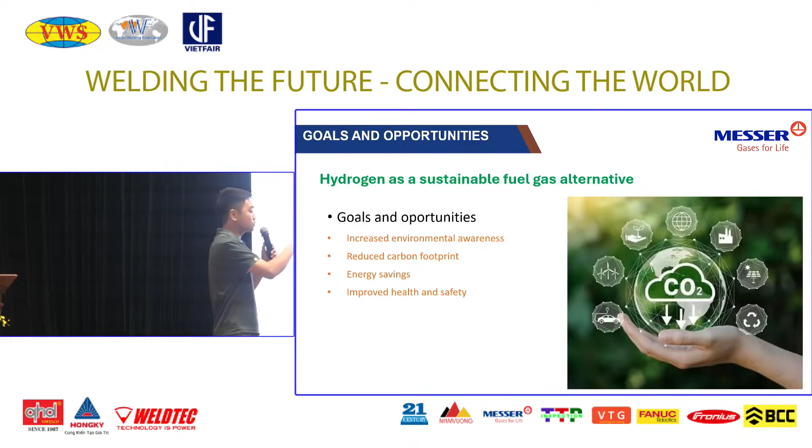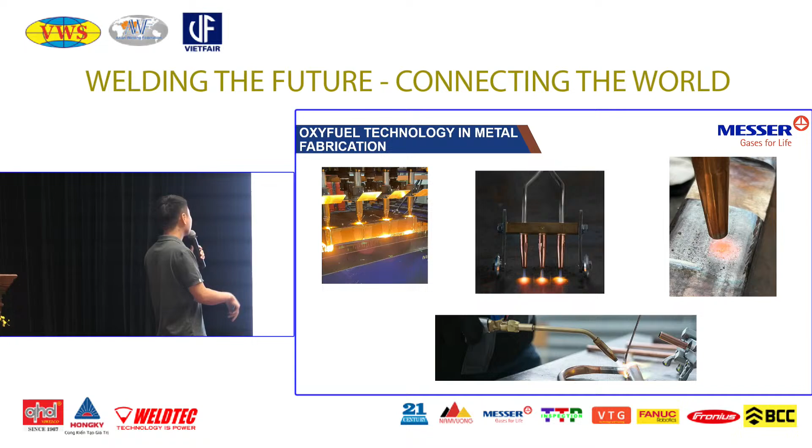Of course you are here as experts in welding and cutting. You know that oxy-fuel technology in fabrication has a lot of applications like cutting, straightening, heating, welding, and soldering.

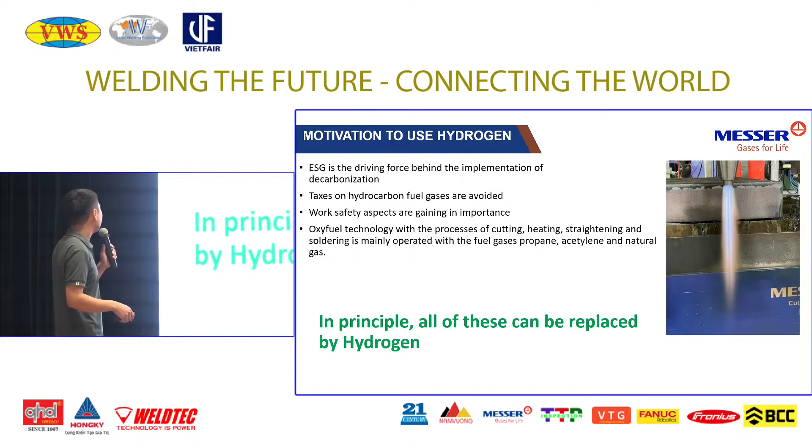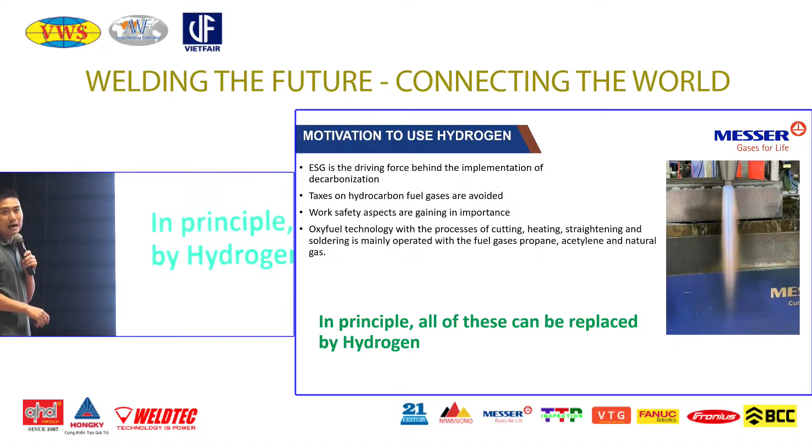So about the motivation to use hydrogen, ESG is the driving force. Every country in the world is talking about ESG. Taxes on hydrocarbon fuel gas also avoids using LPG or acetylene. Work safety is also gaining more importance in the world. Oxy-fuel technology processes like cutting, heating, straightening, and soldering are mainly operated with fuel gases like propane, acetylene, and natural gas. In principle, all of those processes can be replaced by hydrogen. That's Messer's purpose here.

We'll talk a little bit about the advantage of hydrogen in oxy-fuel technology. We did a comparison about CO2 emissions during flame cutting, and here is the result. With hydrogen, you can see there's no carbon atom in the molecule. Comparing the frames, you can see approximately 6 times lower CO2 emission compared to acetylene, and almost 10 times lower CO2 emission compared to propane when cutting. That's very important for CO2 footprint reduction.

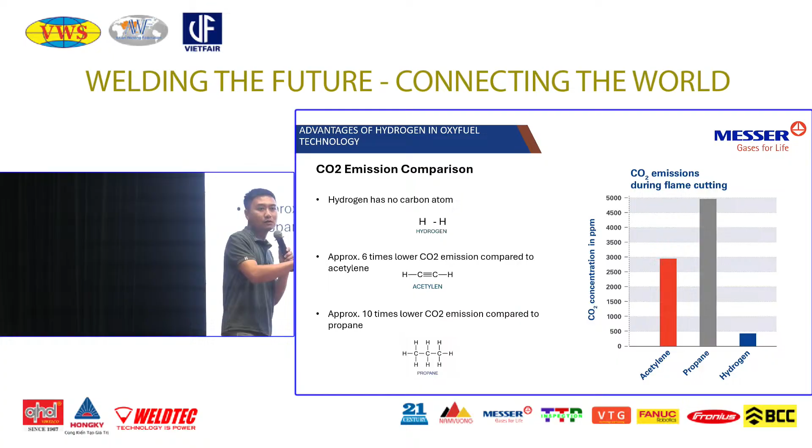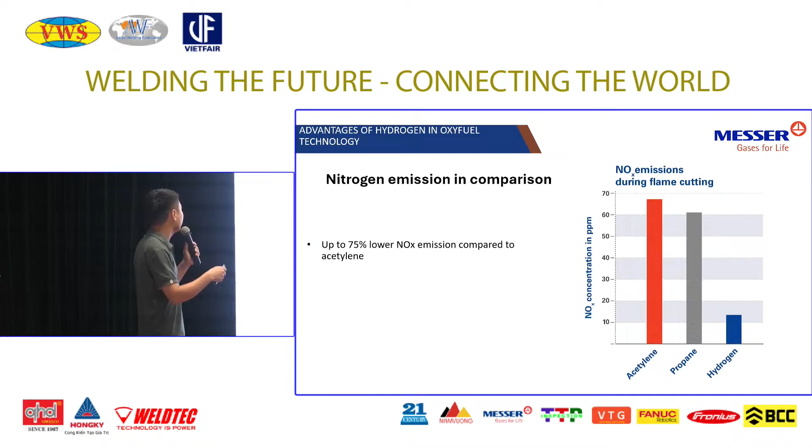For nitrogen oxide emission in comparison, up to 75% lower nitrogen oxide emission compared to acetylene, as you can see in the frame there.

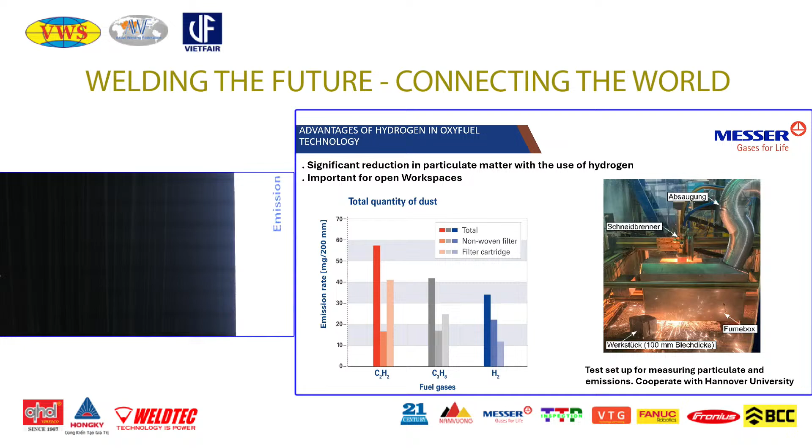This is the result for dust. You can see that with hydrogen we have much less compared with acetylene and propane, and this is very good for the work environment for the worker.

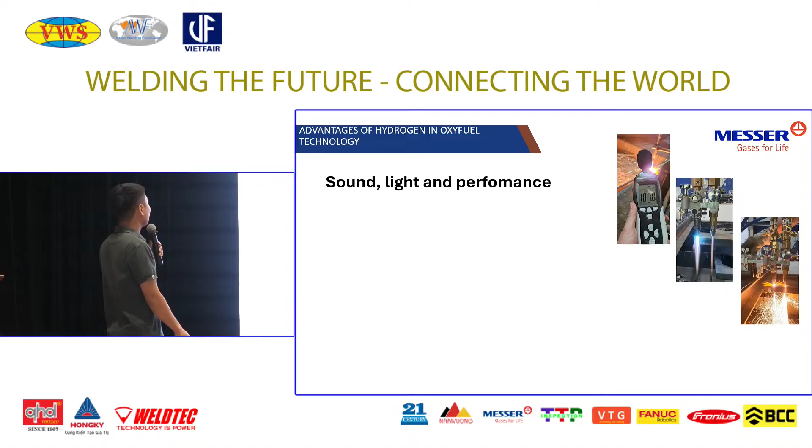About the sound, light, and performance of production, we measured that when cutting or heating with hydrogen, the sound level is 3 to 10 decibels lower, depending on the application - whether cutting, welding, or heating.

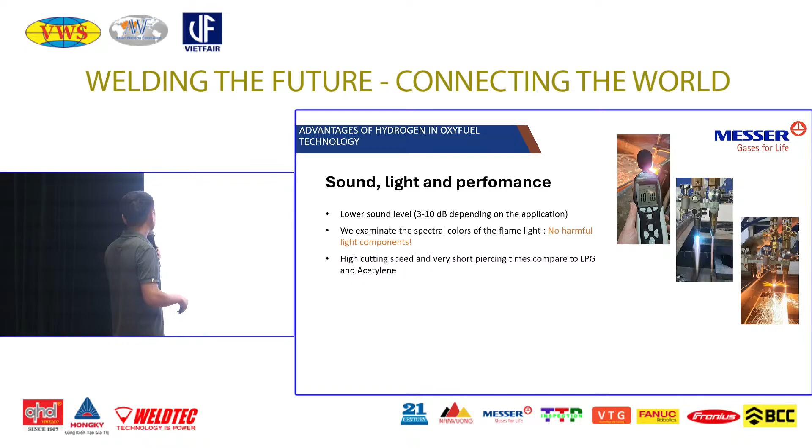We examined the spectral color of the flame light, so there's no harmful light affecting the eyes of the worker - that's a good sign for cutting with hydrogen. And with our equipment, we got high cutting speed and very short piercing time compared to LPG and acetylene.

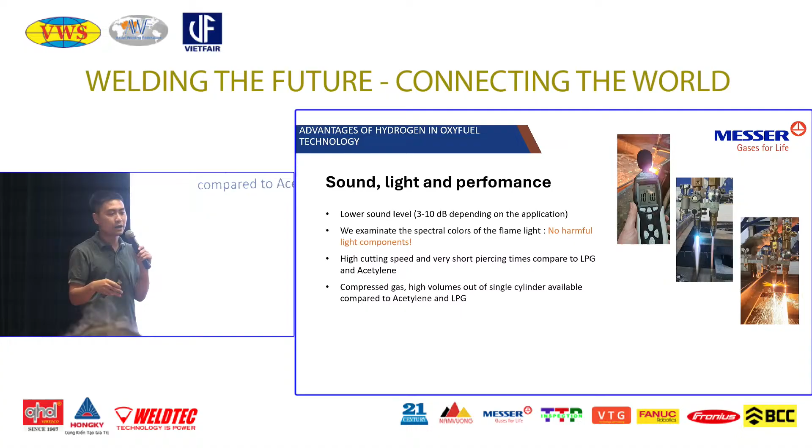Of course, with hydrogen compressed gas at high volume, now in Vietnam we have 200 bar in a cylinder of 50 liters.

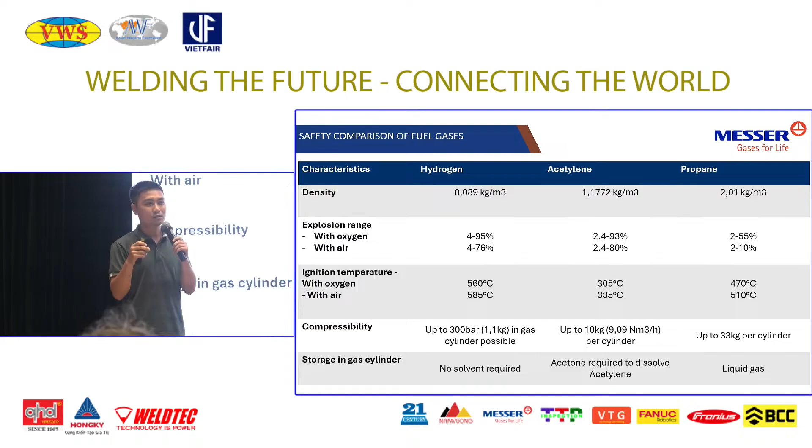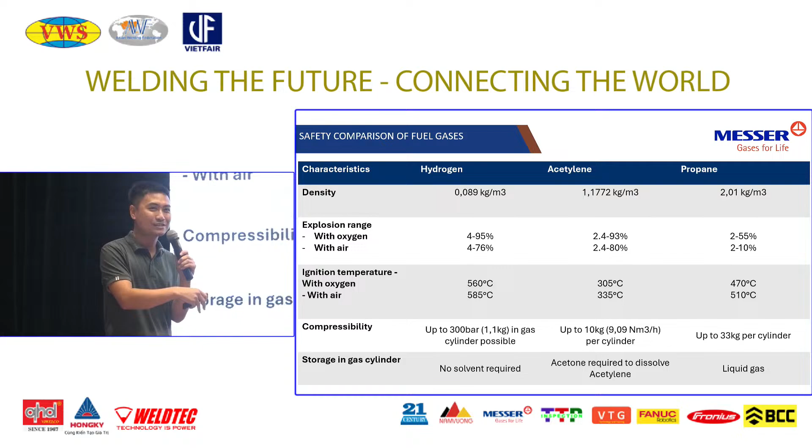I know everybody here will be concerned a little bit about safety when changing from LPG to hydrogen, and this is the characteristics of hydrogen, acetylene, and propane. Before this presentation, I got a question from Dr. Cho about safety. For Messer around the world, we really care about safety - safety is always the first thing we think about.

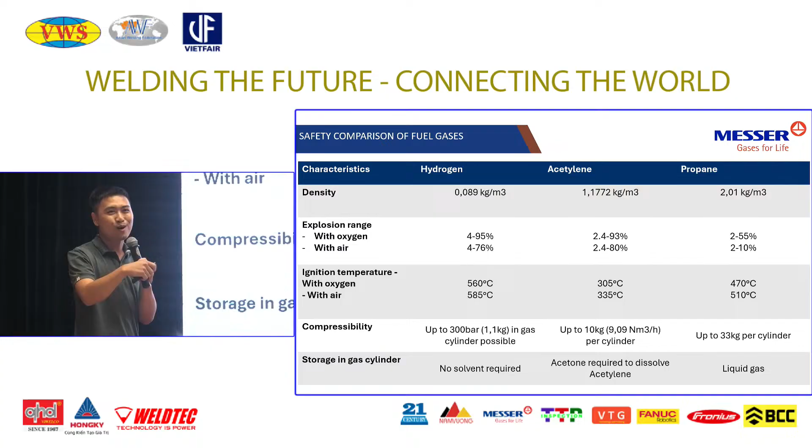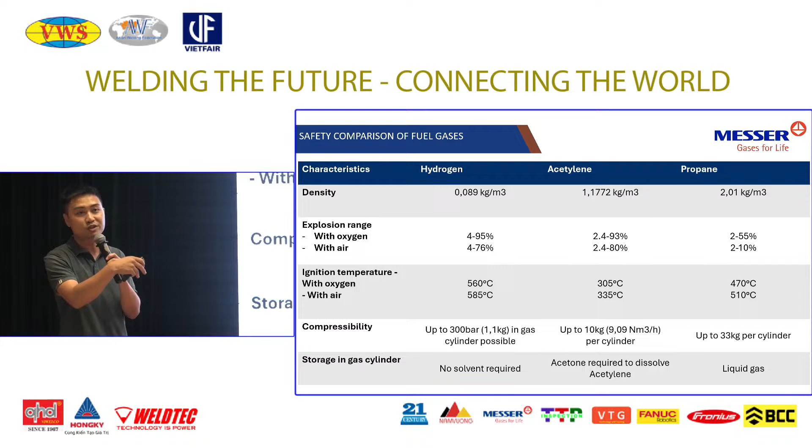This is still under research for the safety of hydrogen, but we have some customers in Europe now using hydrogen. Of course in Vietnam, not yet. We did some demonstrations in Vietnam, at Vard shipyard and some shipyards in the south, but customers are not using it yet because of the hydrogen price and also the equipment price compared with other methods.

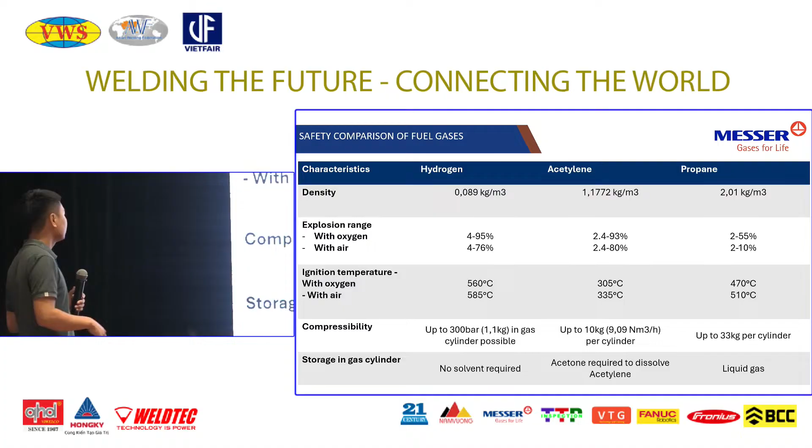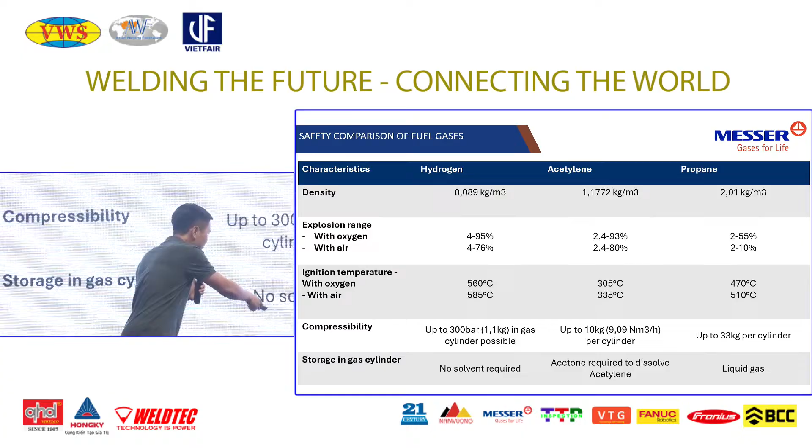But one of the most important things is that with hydrogen, in Europe they now use up to 300 bar in the gas cylinder, and we don't need the solvent required compared with acetylene - acetylene needs to be dissolved.

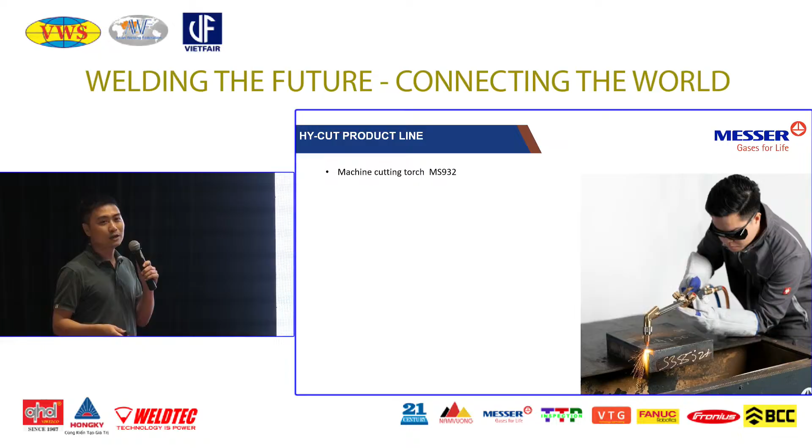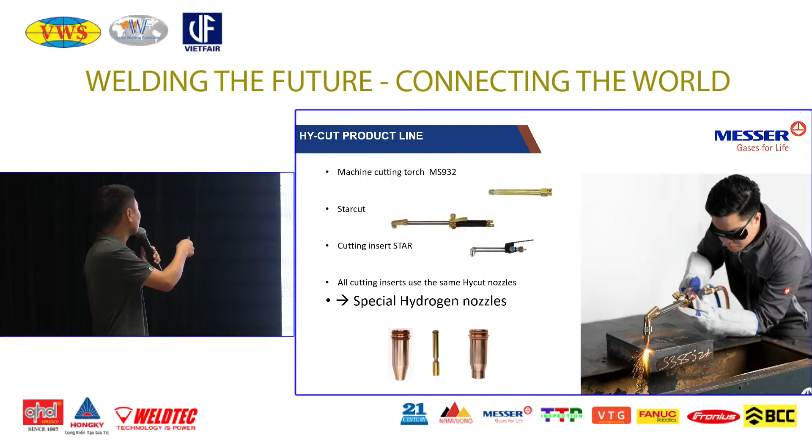About the equipment for this application, we also have a machine cutting torch, a hand cutting torch, a cutting insert, and a special nozzle for hydrogen. We also have a very special torch like that for heating.

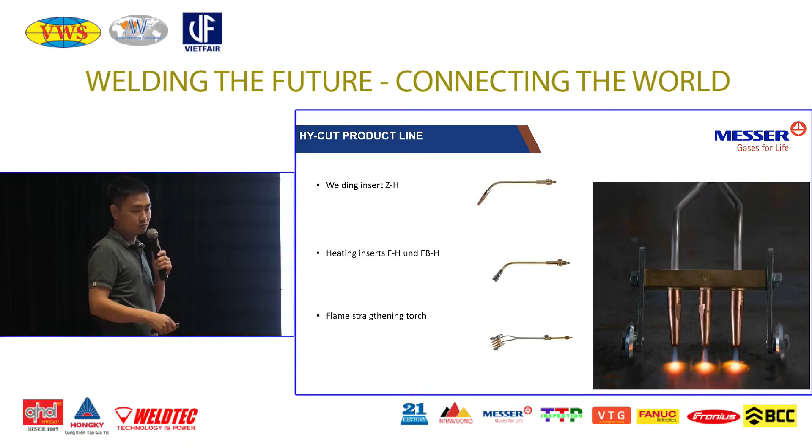In Vietnam now we have a lot of ways to supply hydrogen to the customer. We have cylinders, bundles with almost 16 cylinders like that, and we also supply customers with a tube trailer like this one. So right now in Vietnam we have hydrogen plants from north to south, so it's easy for us to supply the customer in Vietnam.

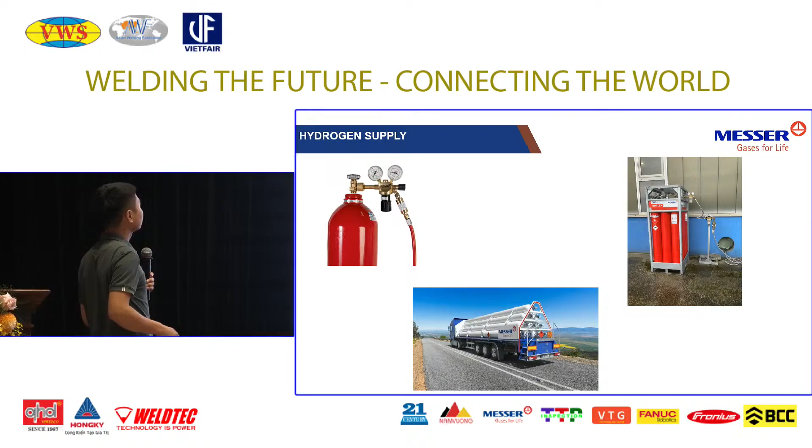Of course, that's all, thank you so much. Thank you. Yes, please. Yeah, thank you. Yes, sir.

As you know, hydrogen in reaction with oxygen will produce water. Water is vaporized, and that is why it has a harmful effect on the quality of the cut, especially with welding. How can we resolve this problem? And the second one, explosion, which is very dangerous when transporting or operating.

Okay, I heard clearly the second question is about the explosion risk with oxygen, right? Yeah, that is a concern for us and also for other people when they use it. Right now, we don't really have something that's 100% safe for the customer to use. That's why we produce some safety devices like a flashback arrestor for hydrogen to keep things safe. About the leakage and anything else, I think I will get your contact and talk more. I will connect you with our experts in Germany and also in Asia to make things clearer. And the first question, sorry, I didn't hear it clearly.

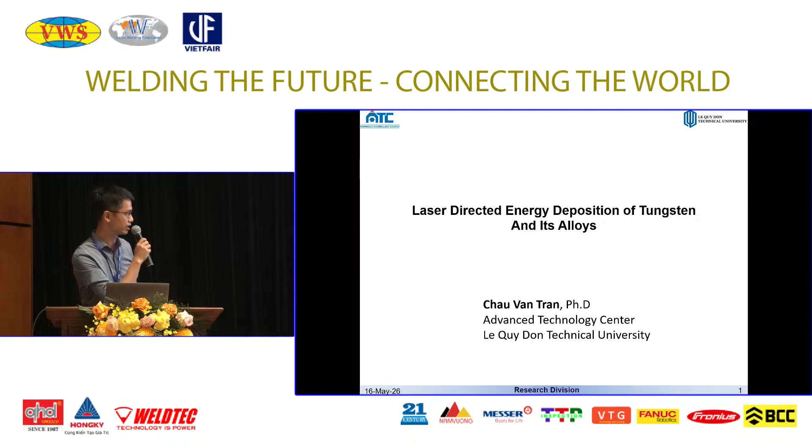Good afternoon everyone, thank you for coming today to the 19th Asian Welding Technology and Application Forum. My name is Chau, and I come from the Advanced Technology Center in Le Quy Don Technical University. The topic of my presentation today is laser-directed energy deposition of tungsten and its alloy.

Here is the agenda of my presentation. It includes an introduction to additive manufacturing, aka 3D printing, and more detail about laser-directed energy deposition. After that, we will briefly review tungsten and its alloy characteristics. Then we want to show some pilot experiments as well as the challenges of L-DED for such materials. Finally, we'll discuss some results and conclusions at the end.

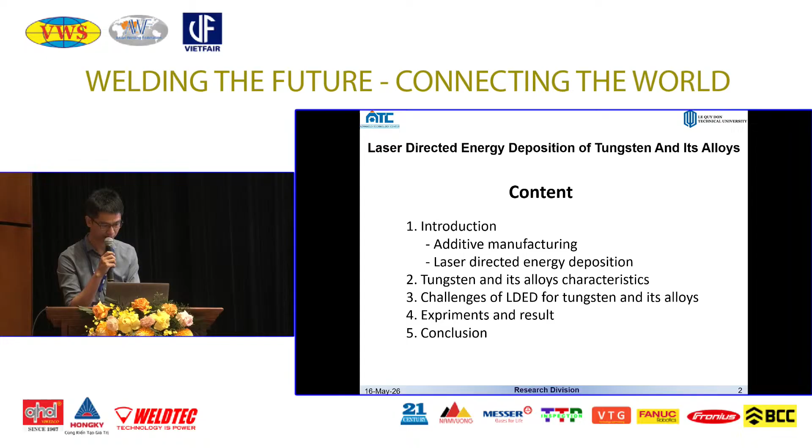While additive manufacturing is a kind of bottom-up approach - this is 3D printing. The part is built up layer by layer from digital files. So the advantage you can clearly see is the efficiency - the only material used is what ends up in the final product. And in theory, there is very little waste.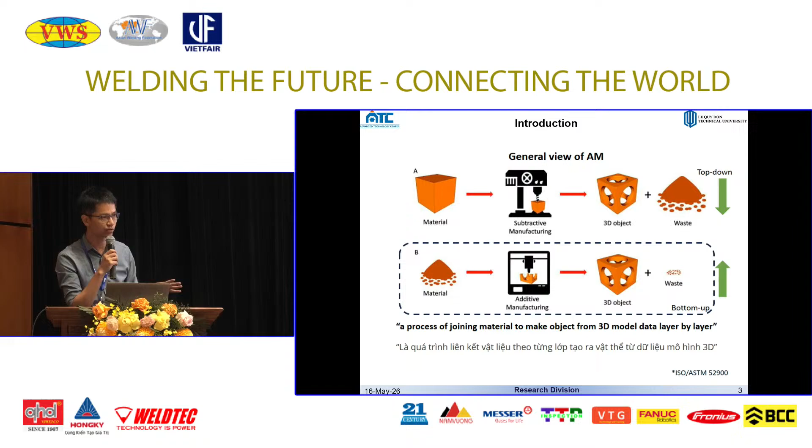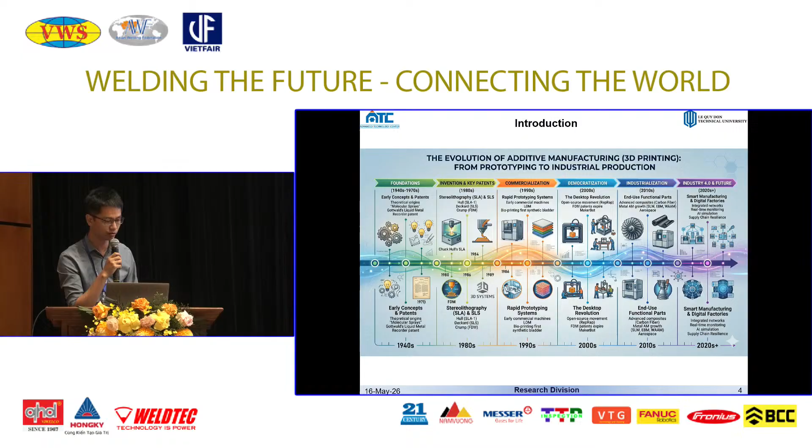Here is the evolution of additive manufacturing. It has a long history, from prototyping to industrial production.

For the AM classification, we can classify additive manufacturing technologies into mainly 7 methods, such as sheet lamination, powder bed fusion, directed energy deposition, binder jetting, and so on. And of these 7 methods, only 4, marked with a rectangle, can be used for printing metals.

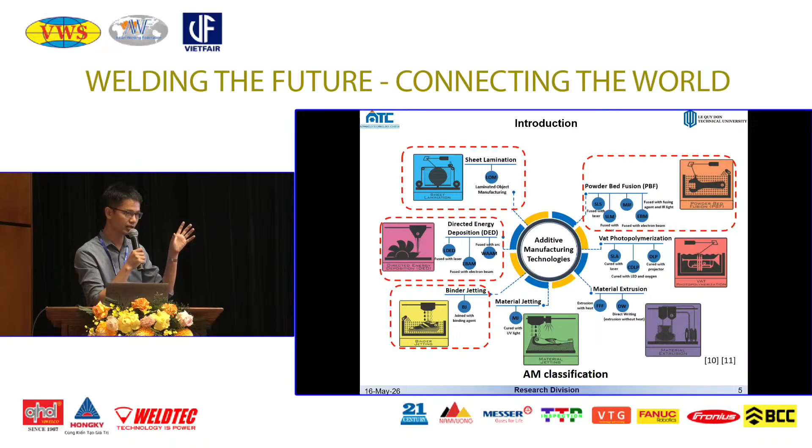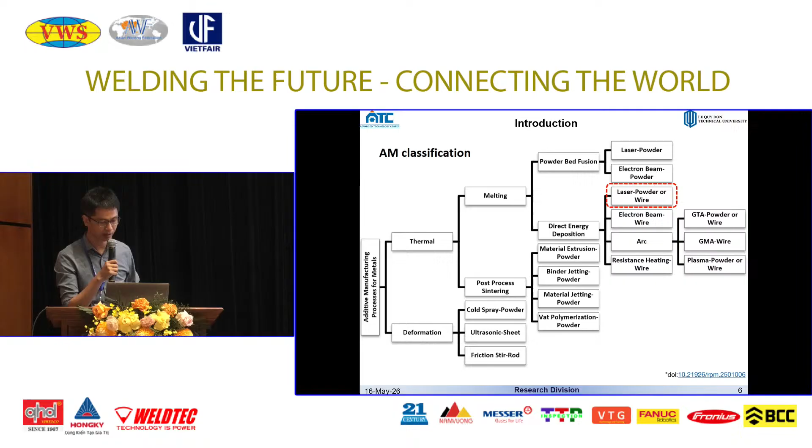Another classification of metal processes can be based on whether thermal energy is used to melt or sinter the material, while others involve only material deformation, which can be further divided into more detailed branches as shown in the image here. Of the 4 AM methods I mentioned before, we can see that directed energy deposition is the most suitable for printing metal parts.

It actually offers high density parts, high deposition rate, as well as readiness for use with multiple materials.

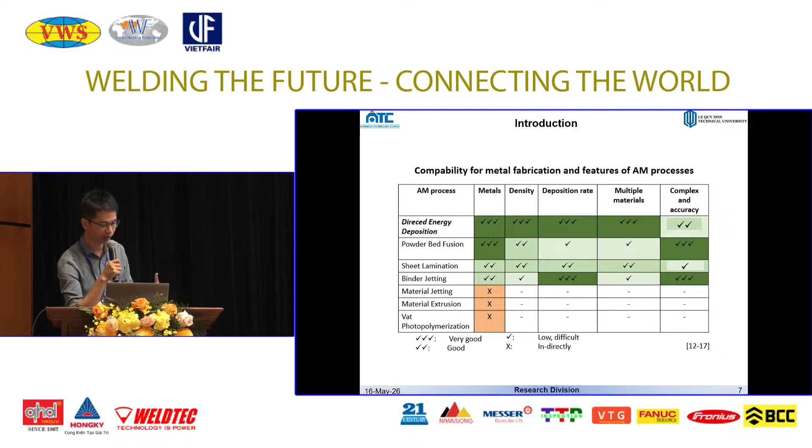Let me briefly introduce the metal additive manufacturing research at our university. We have invested in 3 types of metal AM systems, including selective laser melting, laser directed energy deposition, and wire arc AM. The two on the left are commercial systems, but the one on the right is self-developed, meaning we can access the machine and change any part of it. We mainly use that one for our research, and in this topic we also utilize that system to do the experiments.

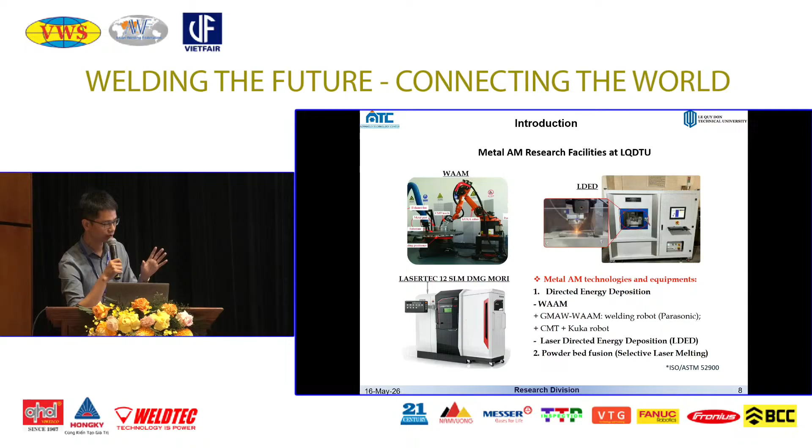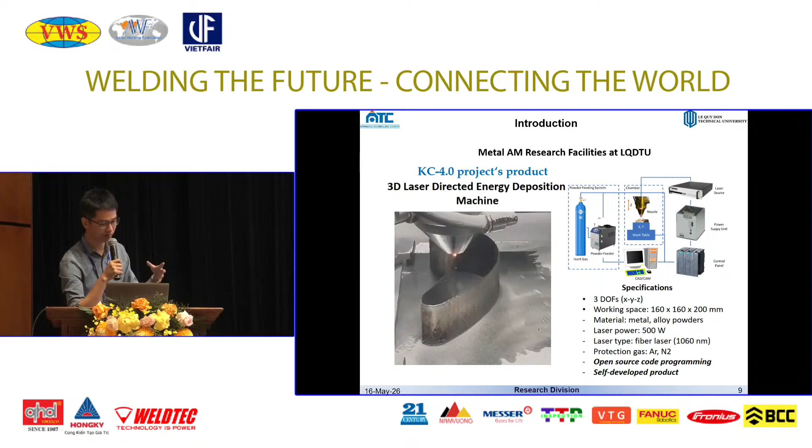Let's talk more specifically about this system. It has 3 DOF, meaning X, Y, Z axes, and the working space is pretty small since it's for experiments: 160 by 160 by 200. For material, we can use any kind of powder in theory, as long as we seal the chamber well. We also use a fiber laser with a power source of 500 watts, and for protection gases we can use argon or nitrogen.

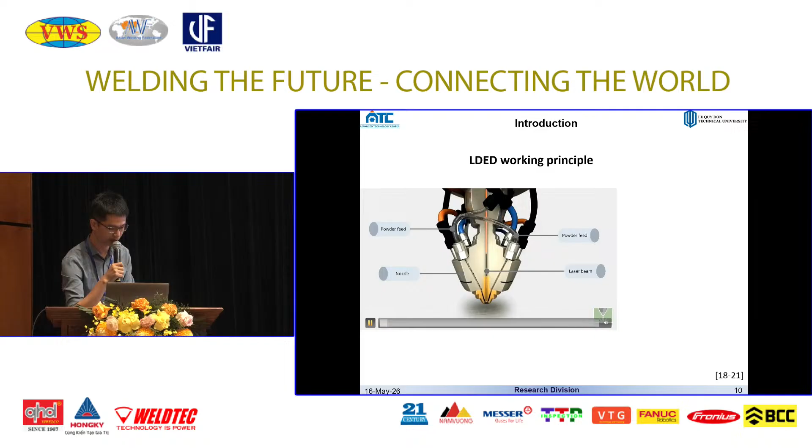Let's see how LDED works. I have a video here, hopefully it runs well. A focused laser beam hits a small area of the substrate, and the metal feedstock, usually powder or wire, is delivered into the molten pool. The material melts and solidifies quickly, so we can utilize a robot arm or CNC system to move the deposition head. Because it's a very high energy, short, and highly focused laser beam, the process can melt almost any kind of metal and alloy, making it very promising for difficult-to-machine materials. With this system, we succeeded in printing stainless steel, titanium, Inconel, and so on.

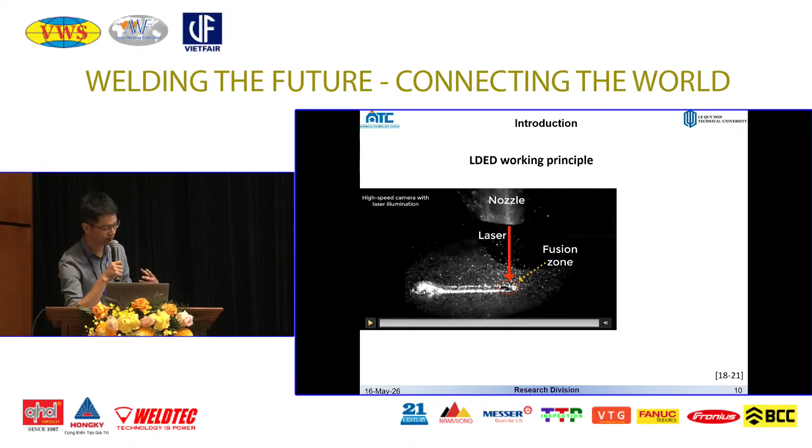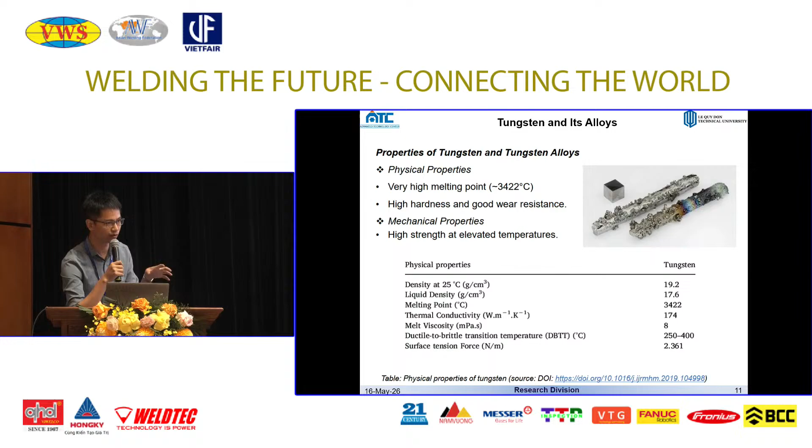One question that immediately pops up is, what about tungsten? Tungsten is well known for its difficult-to-machine characteristics, like very high melting point, high hardness, and very good wear resistance, meaning it's very difficult to cut. Due to this extremely high melting point, hardness, density, and excellent wear and heat resistance, tungsten is used for cutting and machining tools, welding electrodes—we mainly know it for TIG electrodes—and aerospace, defense, and heat shield applications, as well as electronic and electrical applications, especially in fusion reactors where it's used for radiation shielding.

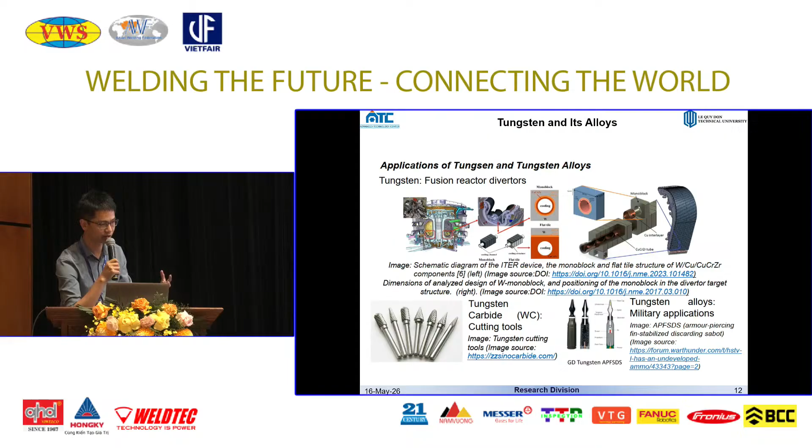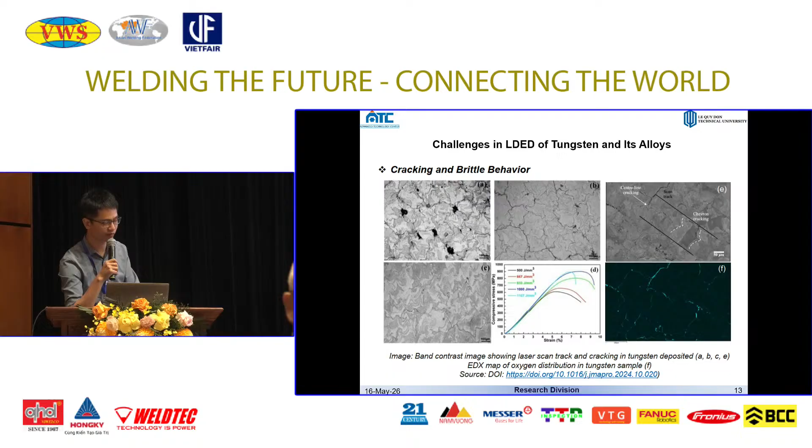So it sounds promising in theory, but printing tungsten and its alloys is not easy at all. First is cracking and brittle behavior. Tungsten has a high ductile-to-brittle transition temperature, so the rapid heating and cooling cycles from laser processing create massive thermal stresses, leading to solidification cracking and intergranular fractures.

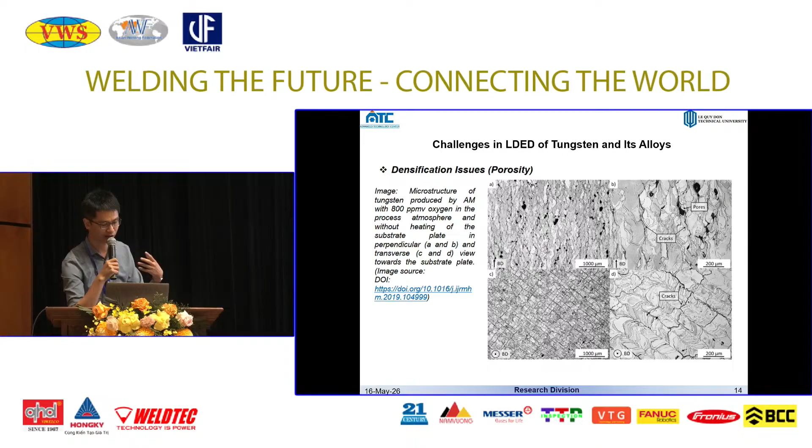The next challenge is densification. Achieving full density is very difficult because of the high melting point and low laser absorption. For tungsten, laser absorption, for example with a fiber laser, is actually pretty low, lower than 30%. This requires very high energy density, which can cause keyholing or evaporation of the material.

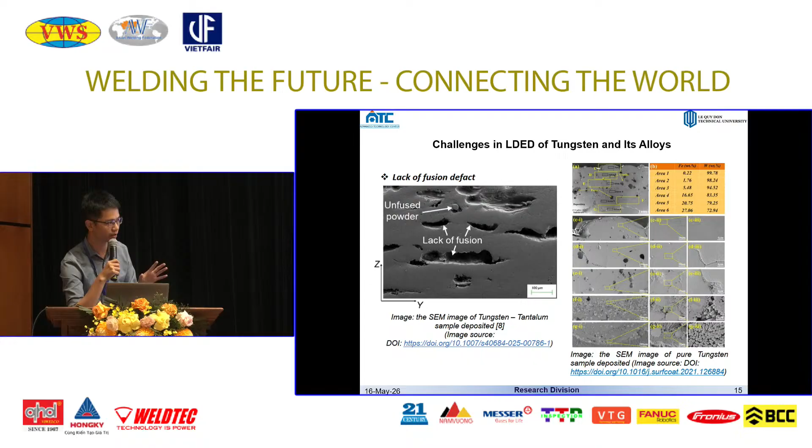Last but not least, tungsten has a very high oxygen affinity, meaning it's very easy to oxidize in a non-inert environment. Tungsten reacts easily with oxygen at high temperature, forming oxides, which weakens the grain boundaries and promotes cracking.

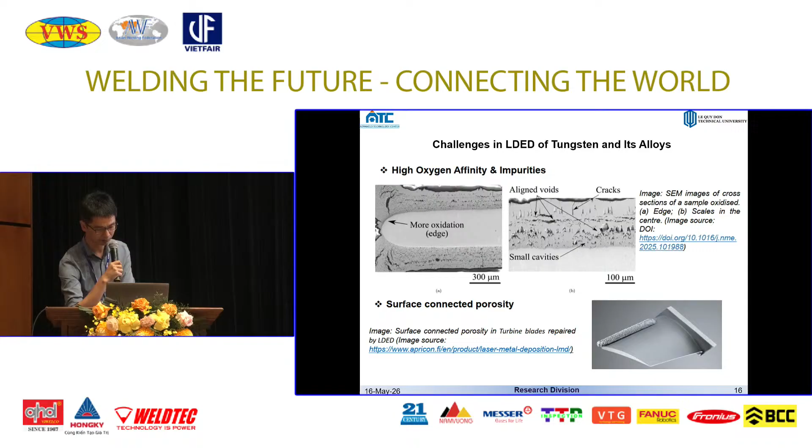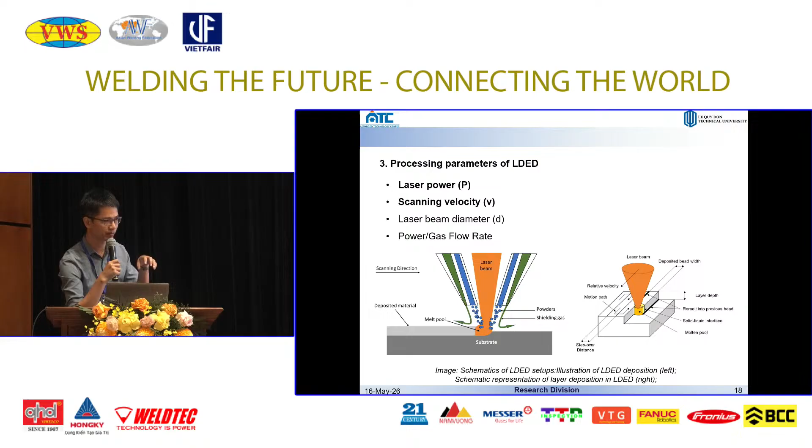We tried to conduct some pilot printing and tests on tungsten using our system as shown before. Before doing the experiment, we determined some key parameters we need to control, like laser power, scanning velocity, as well as laser beam diameter or powder gas flow rate. But in this pilot experiment, we just focus on laser power and scanning velocity.

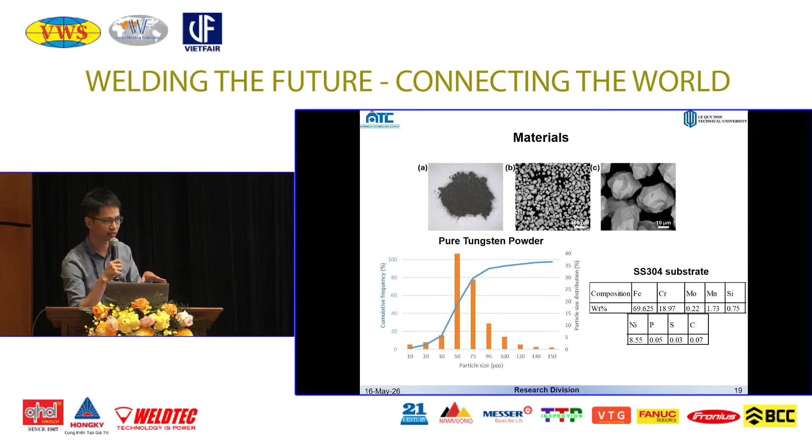Let's talk about the material. We used pure tungsten powder with a particle size around 50 to 75 micrometers, and the substrate was stainless steel SS304.

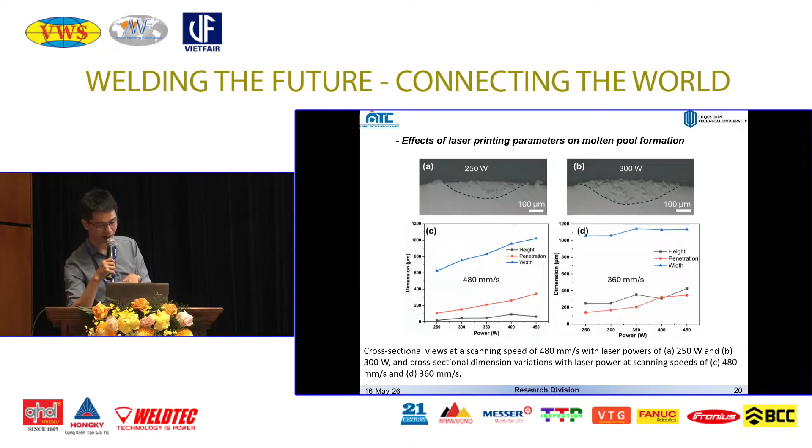These are some very first results. We varied the laser power and cut the sample to see the inside structure of the printed layer. We can see the bead dimension increases when the laser power increases, of course. But when the scanning speed is smaller, the volume density is higher, and the beads become larger and unstable.

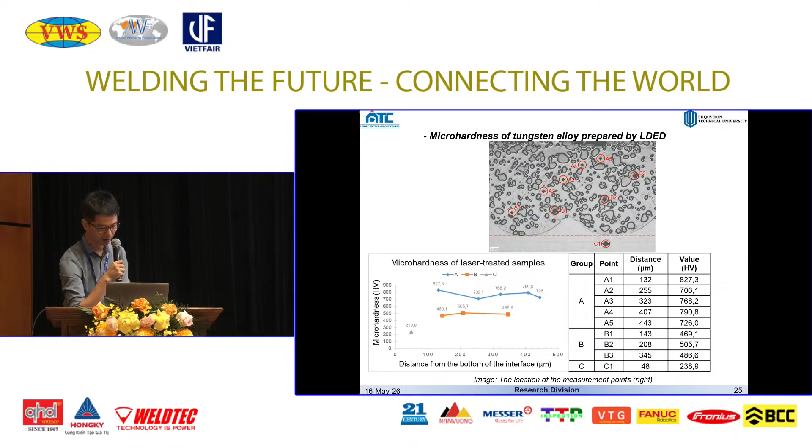For deeper understanding of the crystallization of the sample, we produced XRD analysis. On one side is the XRD analysis for only tungsten powder, and on the other side is for the LDED sample. In the LDED sample, some tungsten and intermetallic structure peaks appear in the XRD.

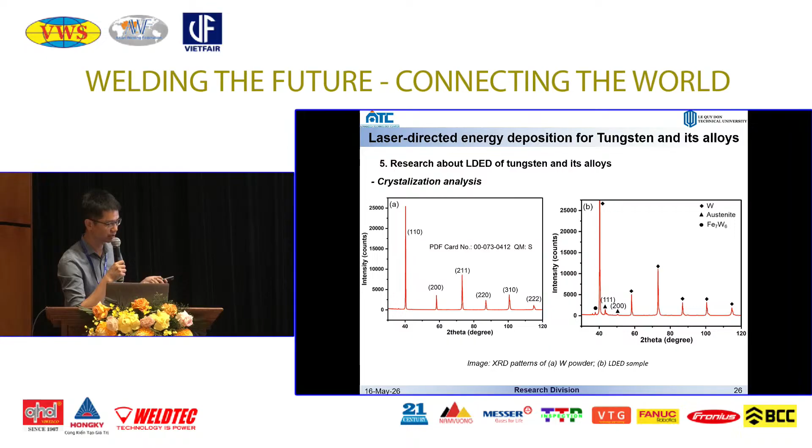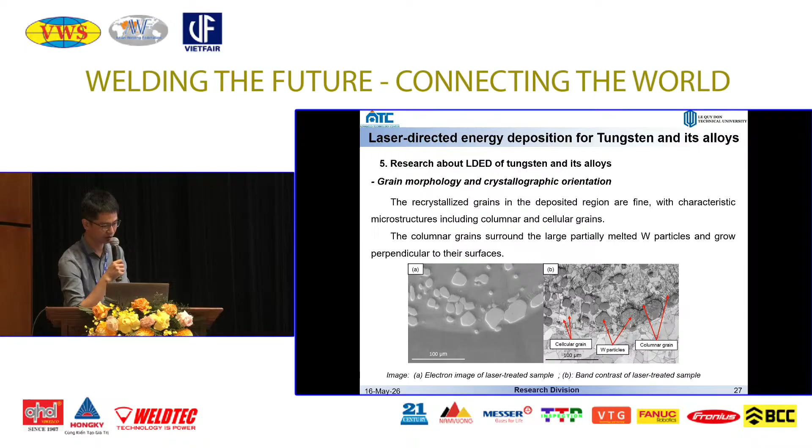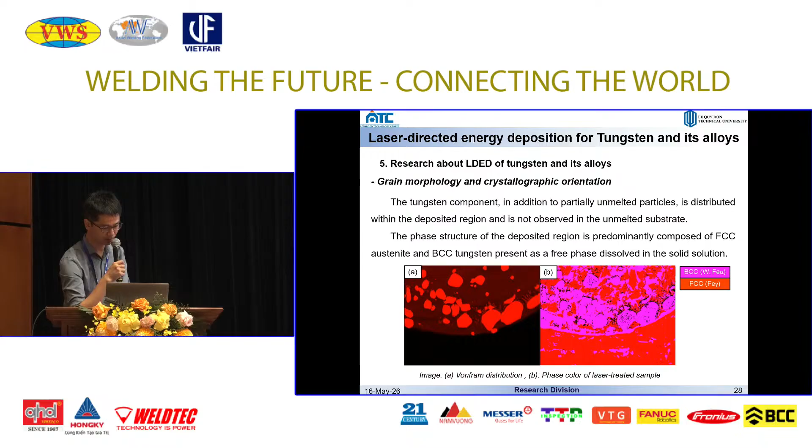To investigate the grain morphology and crystallographic orientation, we produced EBSD characterization, and we can see phase changes due to the LDED process. Here are some images of the band contrast and IPF of the LDED sample.

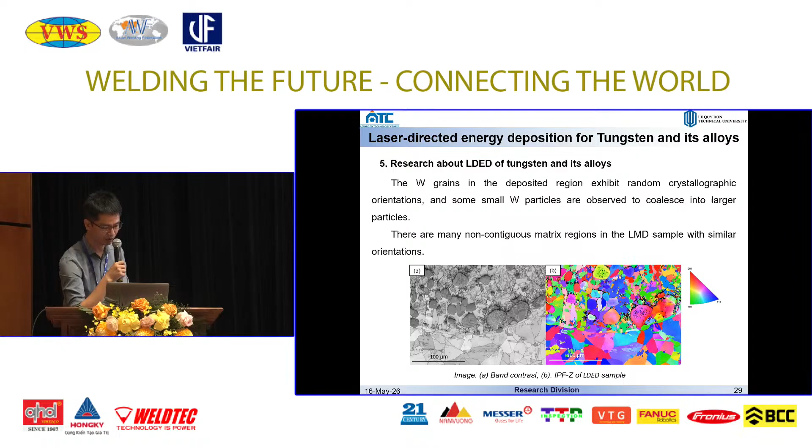For conclusion, we successfully deposited pure tungsten on stainless steel using the LDED process, and we were able to measure some parameters and analyze the elemental and mixing zones, and so on.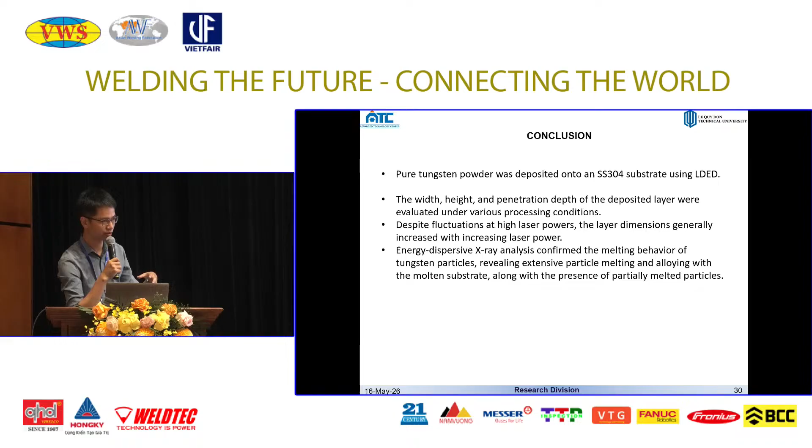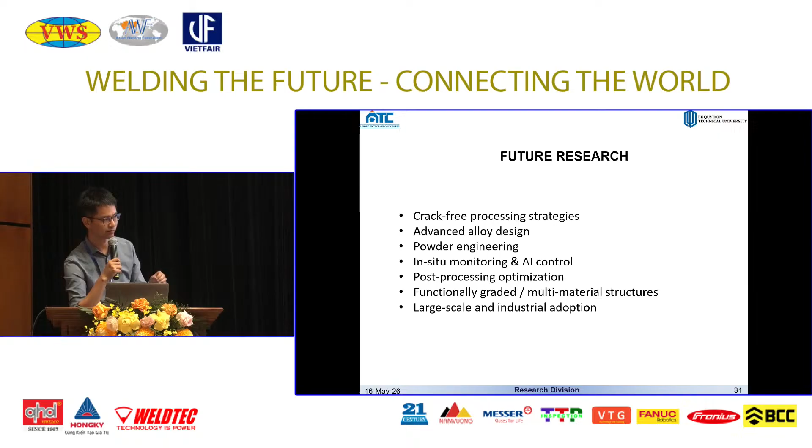Also, for future research, we suggest developing crack-free processing strategies and advanced alloy design. Right now we just deposit tungsten powder on stainless steel, but we could mix other kinds of powder to achieve more advanced features. That is our plan.

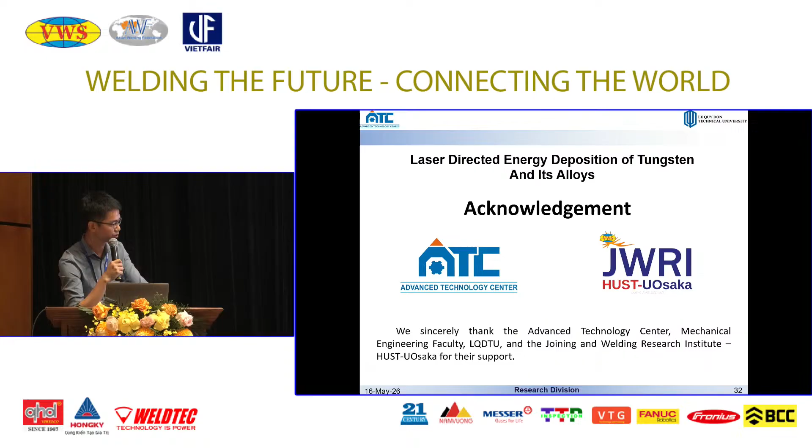Yes, thank you very much for your interesting presentation. But I have one question only. Since you are feeding powder to the melting area, can you present the size and morphology of the powder? Because depending on the size and morphology, the feeding rate stability is affected.

Yes, sir. Okay, Henrik.

Very good presentation, I have three suggestions. One, the powder itself may affect the crack sensitivity heavily, according to my experience. If you 3D print pure tungsten, cracks occur easily. I think the powder itself, made from different technology, will affect this. That's the first suggestion. The second, you already mentioned in your presentation that tungsten alloy will reduce cracking. The third suggestion is that normally we use a commercial 3D print machine and the temperature field is too great, and the temperature decreases so quickly from the welding pool. If we modify the beam, maybe the result will be better.

Thank you. My name is Terumi Nakamura from Japan Welding Engineering Society. I will introduce expanding additive manufacturing technology using the database.

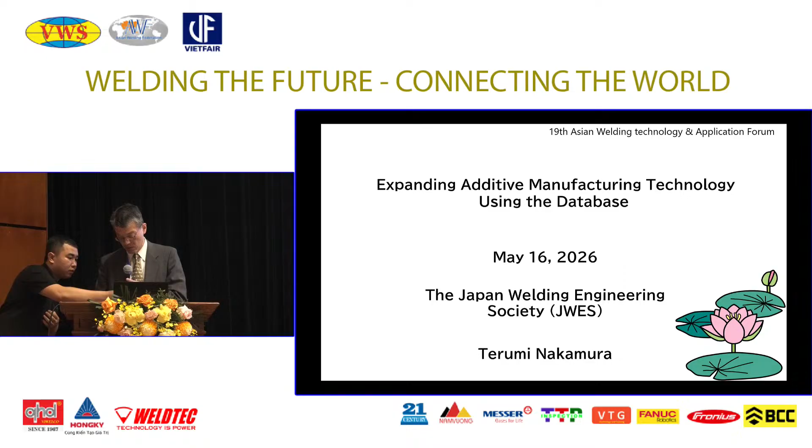Additive manufacturing is a metal manufacturing technology adopted as a production method. However, AM technology has several challenges. First is variable properties - properties of built parts such as density and strength vary by process parameters. Next is complex parameters - metal AM has many manufacturing and process parameters, making it difficult to set suitable conditions. Last is high entry barriers - preliminary tests are required to determine properties and parameters, leading to cost rise and longer development time. These factors give a great burden for SMEs and startups, so AM technology is not used widely in manufacturing.

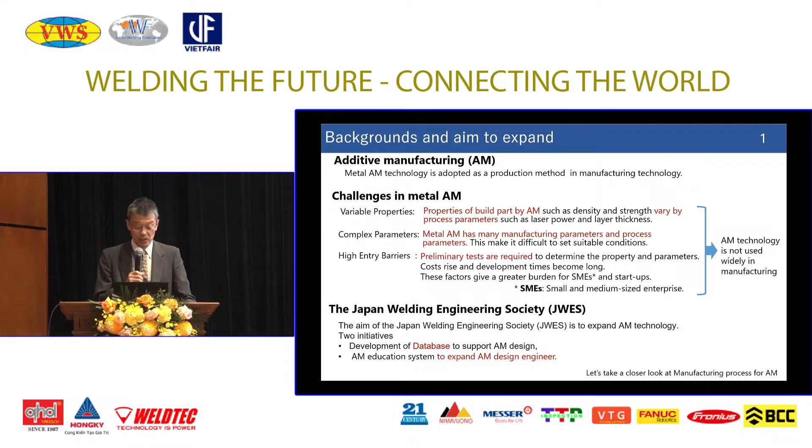So the aim of the Japan Welding Engineering Society is to expand AM technology. We set two initiatives: first is development of a database to support AM design, next is an AM education system to expand AM design engineers.

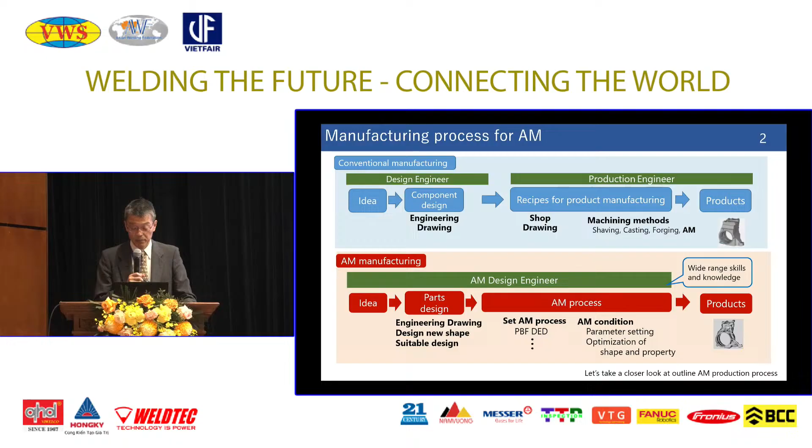This is the manufacturing process for conventional manufacturing and AM manufacturing processes. In conventional manufacturing, the design engineer creates the component design and writes engineering drawings. Next, the production engineer makes the recipe for product manufacturing, creating the shop drawing and selecting the machining method - for example, shaving, casting, forging, and additive manufacturing.

This is the AM manufacturing process. There is an AM design engineer who must handle part design, AM process selection, and production design. In part design, the AM design engineer draws the engineering drawing and designs new suitable shapes. For AM process, the engineer selects the AM process - powder bed fusion, DED, or other processes - and selects the AM condition, parameter setting, or optimization of shape and property. So the AM design engineer requires a wide range of skills and knowledge.

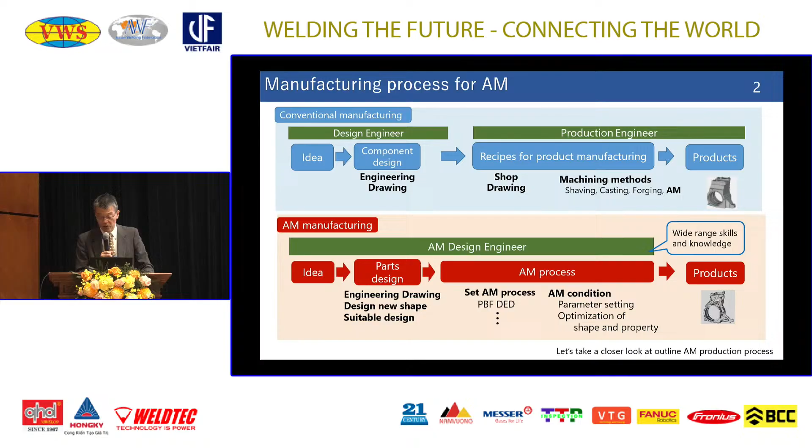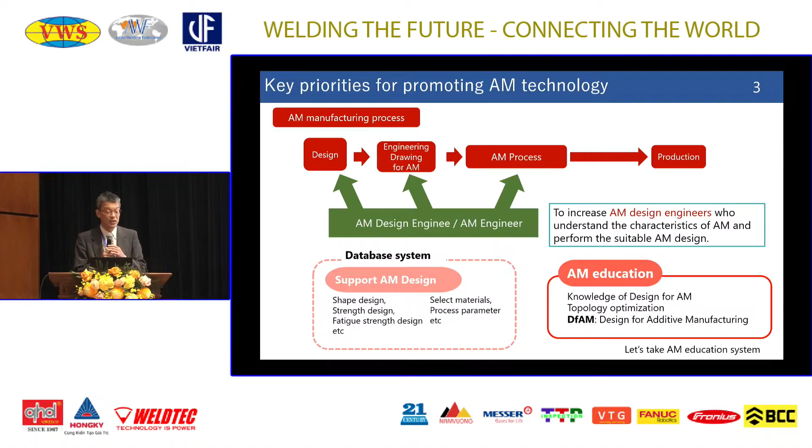To increase AM design engineers who understand the characteristics of AM and perform suitable AM design, we thought AM education was important. Knowledge of design for AM, topology optimization, and DFAM (design for additive manufacturing) is very important. First, we show the AM education system developed by JWES.

This is the JWES AM Engineer Certification System, JAMECS. JAMECS is a certification program to train engineers who can understand AM and effectively utilize it. This education system is divided into 3 parts: level 1, level 2, level 3. Level 1 is basic, level 2 and level 3 are specialized for specialists. Level 1 started in 2025, level 2 will start in 2027, level 3 will start in 2028. The level 1 training course is held over 3 days.

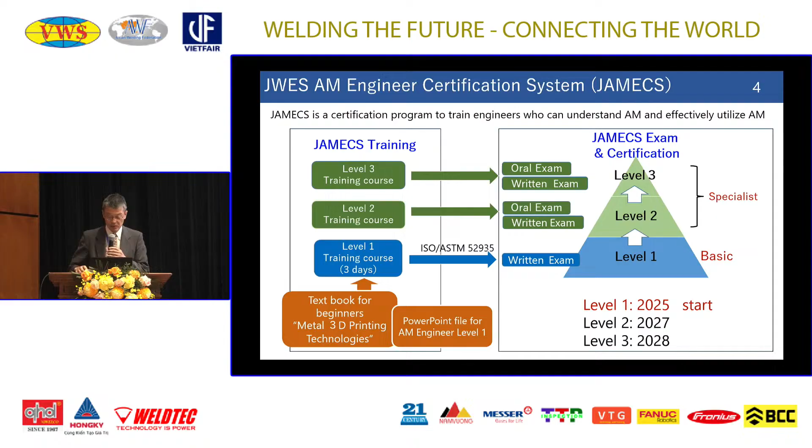Textbooks and PowerPoint files for the AM Engineer Level 1 have been made, and a written examination is carried out. For Level 2 and Level 3, oral examination and written examination will be carried out. EWF made the AM certification system called IAMQS - International Additive Manufacturing Qualification System. JWES is the implementing body of IAMQS.

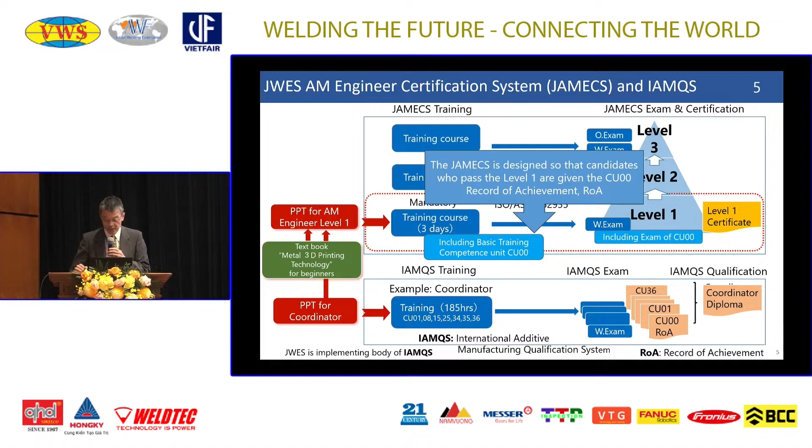JAMECS is designed so that candidates who pass level 1 are given CU00, which is a competence unit record, giving the CU00 record of achievement, ROA. For example, the coordinator training lecture time is 185 hours. After the examination, the coordinator diploma is obtained. JAMECS system is designed so that the candidate obtains the CU00 certification.

This is the lecture time and part of the competence unit. This is the coordinator - 185 hours is necessary. The CU00 basic competence unit is like this.